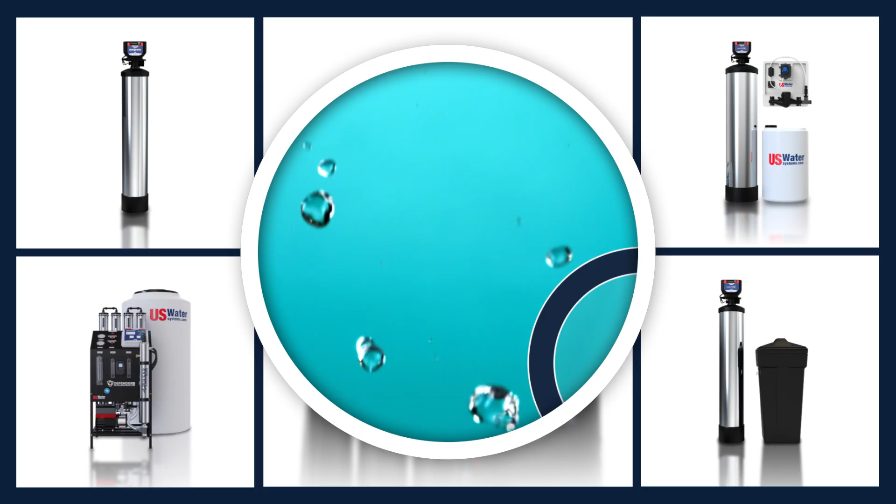In this US Water Systems review video, you'll see a lineup that covers all of those angles, and you'll get a clear feel for what daily life looks like with each setup, how it treats your water, how it fits into your home.

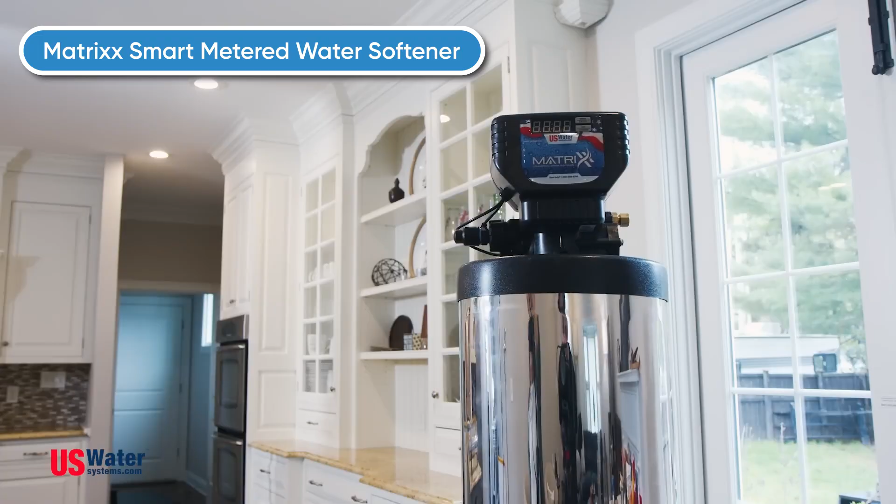Let's start with a smart, metered softener in these US Water Systems water softener reviews. Because if scale is your main headache, this is the kind of system that changes your day fast. You're swapping out the minerals that form hard crust in pipes and appliances, so your water heater, dishwasher, and washing machine don't spend their lives fighting buildup. In normal use, that shows up as fewer spots on fixtures and less of that chalky film you scrub off the shower. The upshot is you spend way less time cleaning, and your appliances get an easier job.

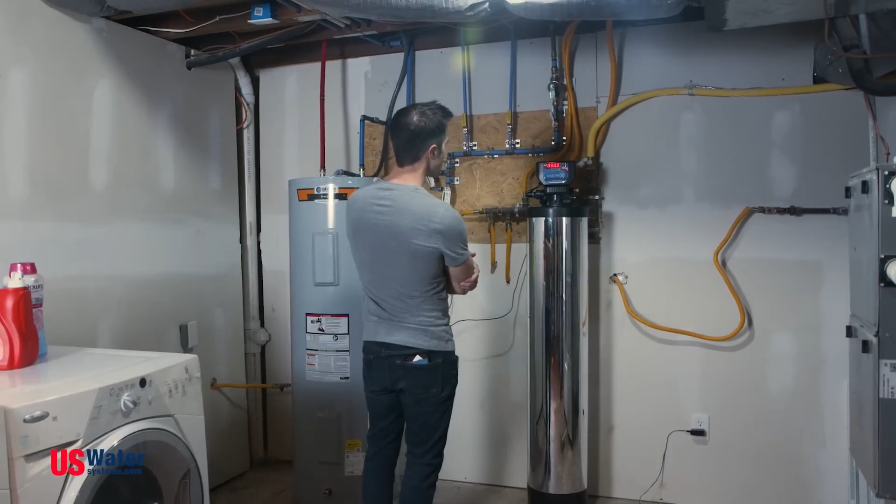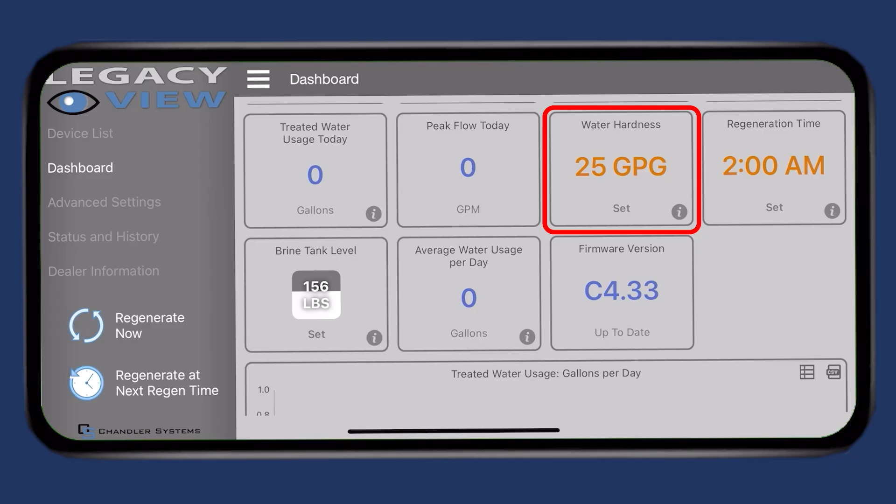What really shapes the experience here is the control valve and how you interact with it. This one uses a WQA Gold Seal certified smart control valve that connects to your phone over Bluetooth 5, so you can open the Legacy View app and see water use, regeneration cycles, and even salt levels without walking over to the tanks. You can adjust your hardness setting right from that same dashboard, so you're not guessing when you want the water to feel a certain way at the sink or in the shower.

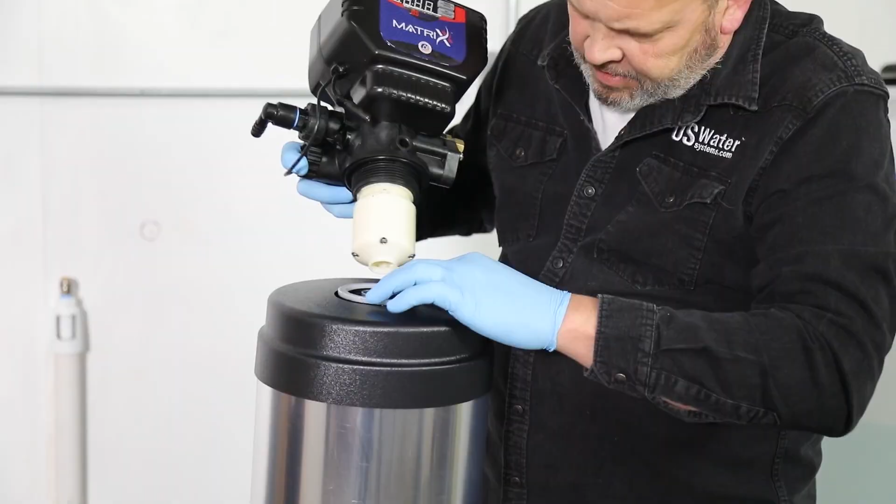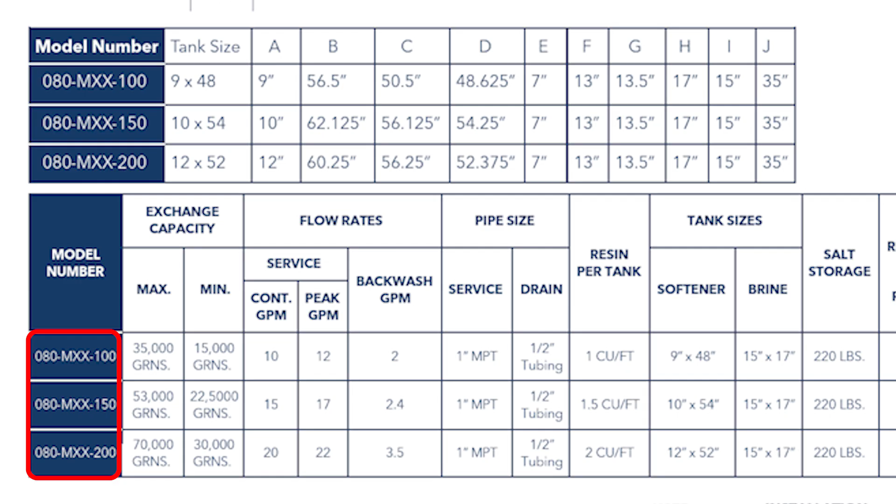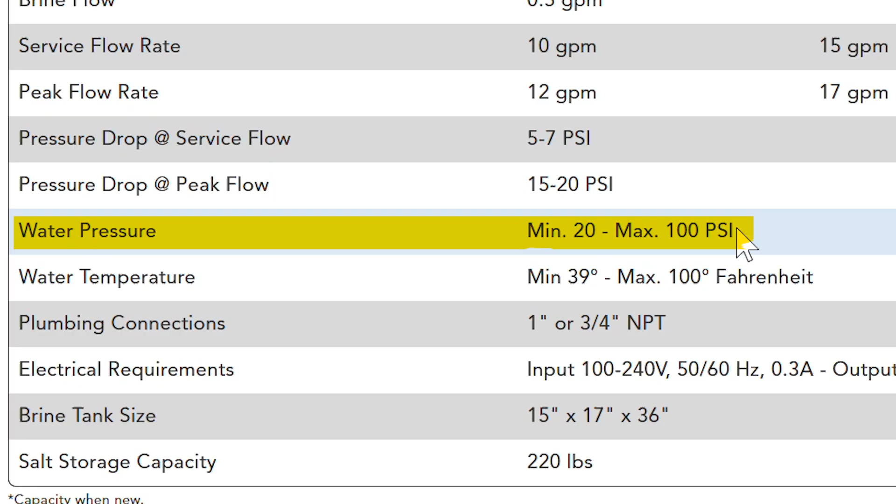Because it's built around a simple, single internal moving part, you get that set it and forget it vibe without losing the modern monitoring. Sizing and flow are where this system starts to feel like it belongs in a real household instead of a spec sheet. You can choose a 10, 15, or 20 GPM service flow configuration, so a bigger household doesn't have to tiptoe around showers and laundry. Depending on the model, maximum softening capacity ranges from 35,000 to 70,000 grains, so you can match it to how hard your water is and how much you use. And with a listed working water pressure range of 20 to 100 psi and water temperature range of 39 degrees to 100 degrees Fahrenheit, it's built to sit in the background and just keep up.

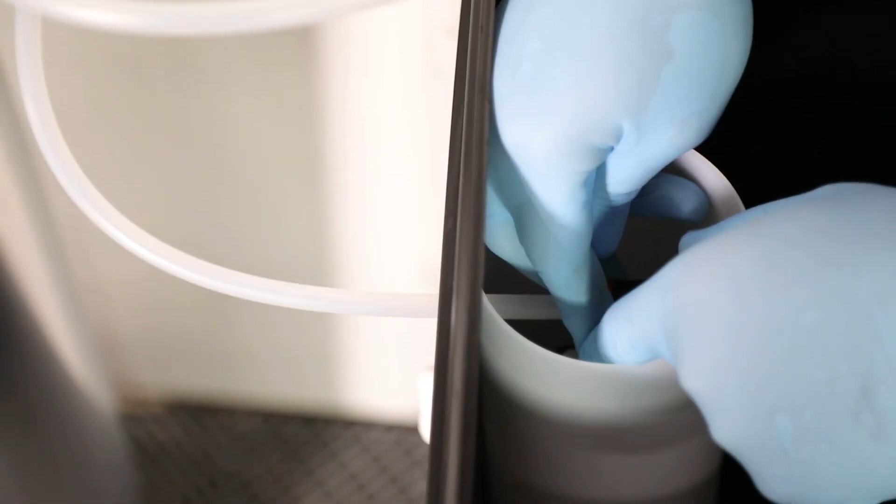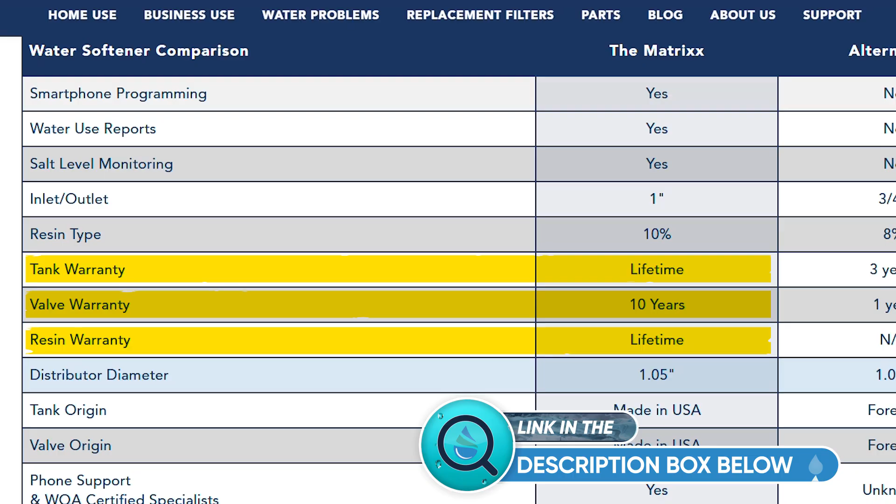Day to day, the routine is mostly about salt and peace of mind. The brine tank holds up to 220 pounds of salt and includes an internal float and safety overflow, so you're not topping it off constantly and you've got built-in safeguards around the refill cycle. It runs on low voltage and includes battery backup, so the system keeps its protection mindset even when your power blips. And with a lifetime warranty on the tank and resin, plus a 10-year warranty on the valve and electronics, this one makes the most sense when you want soft water that feels modern to own and easy to live with in this US Water Systems Reviews lineup.

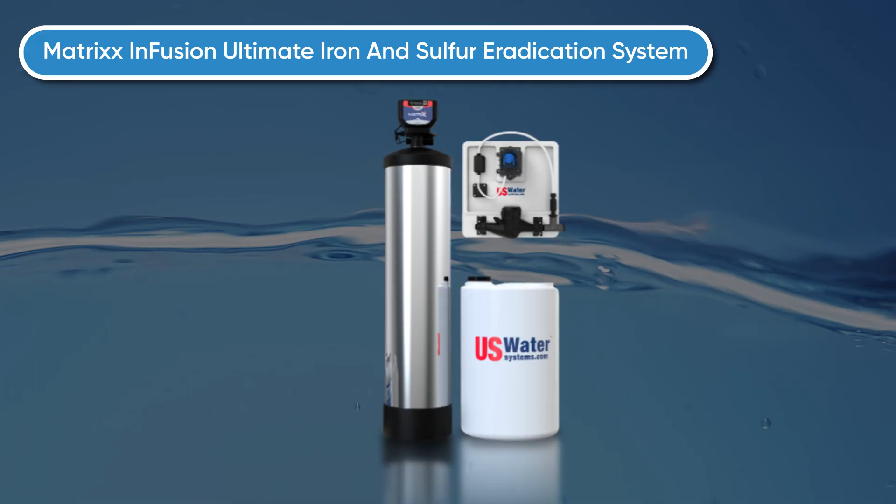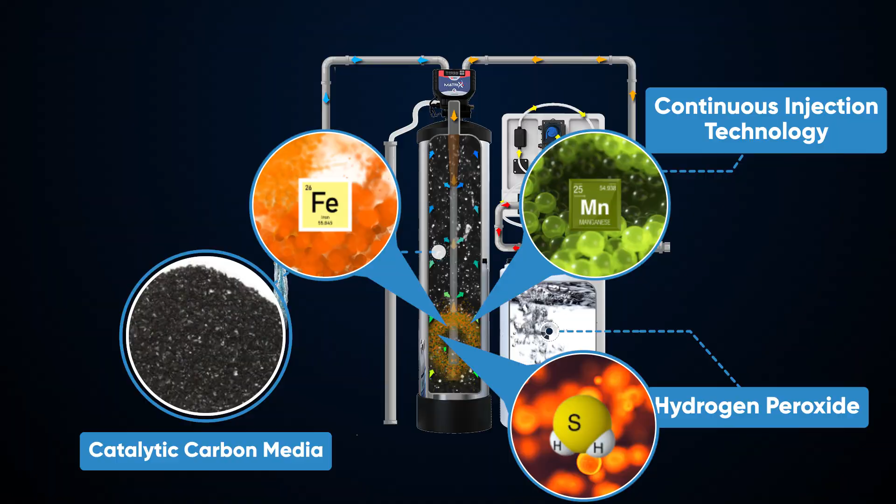This Matrixx InFusion Ultimate Iron and Sulfur Eradication System injects hydrogen peroxide using continuous injection technology, then pairs that with catalytic carbon media, so iron, manganese, and hydrogen sulfide get oxidized and handled in the filtration process. In practice, that's the difference between water you avoid and water you actually use, brushing your teeth without flinching, cooking without odor creeping into the steam, and rinsing sinks that don't instantly look stained again.

The reason that matters is simple: it treats the cause, not just the smell. The performance targets are clearly defined, which helps you match it to your situation. Typical contaminant removal is up to 20 parts per million iron, up to 30 parts per million hydrogen sulfide, and up to 1 part per million manganese. So you're not wondering whether it's meant for light nuisance issues or heavier well water challenges.

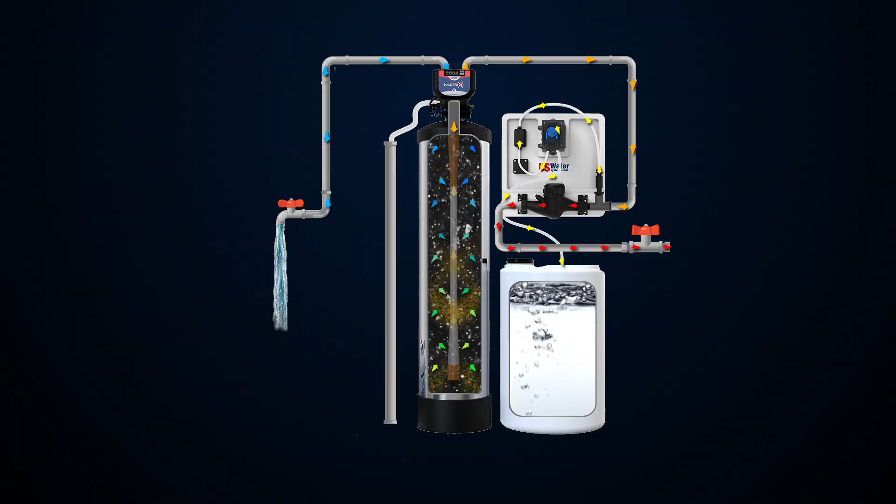It's built to work effectively in a pH range of 6 to 9. And it works with iron and sulfur-reducing bacteria too. So when your water problem feels layered, odor, staining, and biology all at once, you're working with a system specifically designed for that kind of messy reality.

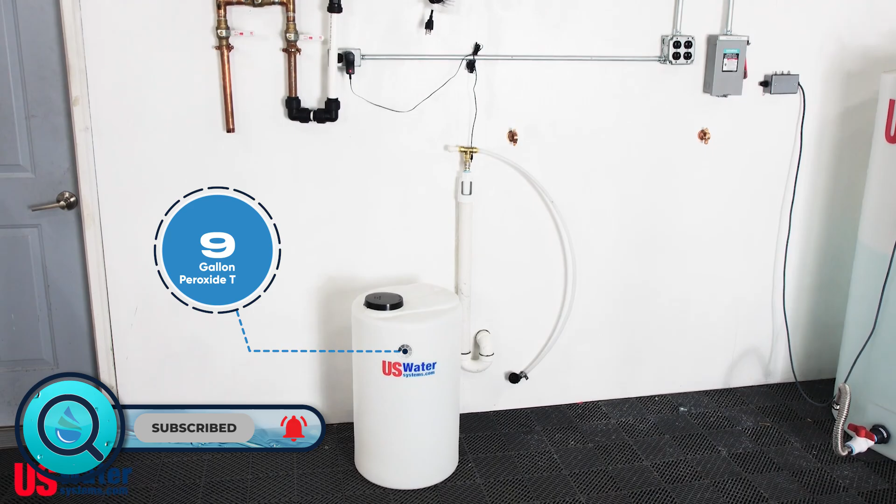Ownership on this one is all about controlled dosing and automatic cleaning. The setup includes a 9-gallon peroxide tank, a precision injection panel, the InFusion filter, and 10 gallons of H2O2. So you're starting with a complete treatment loop instead of piecing it together.

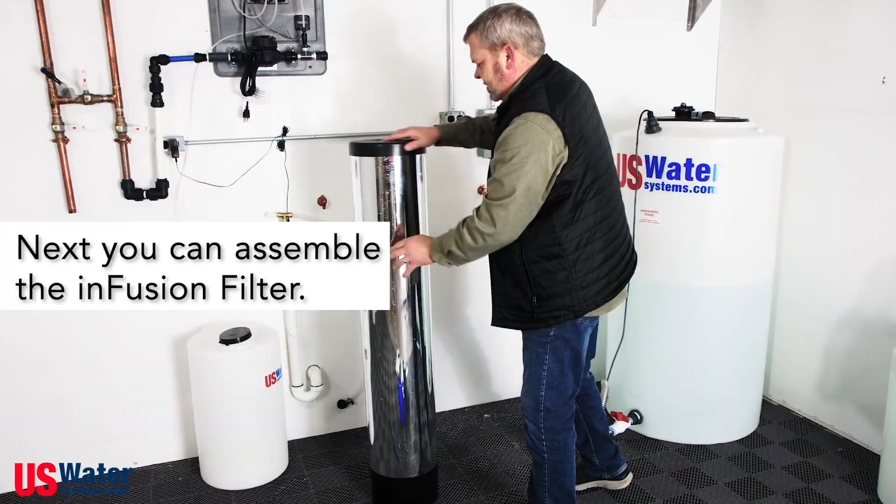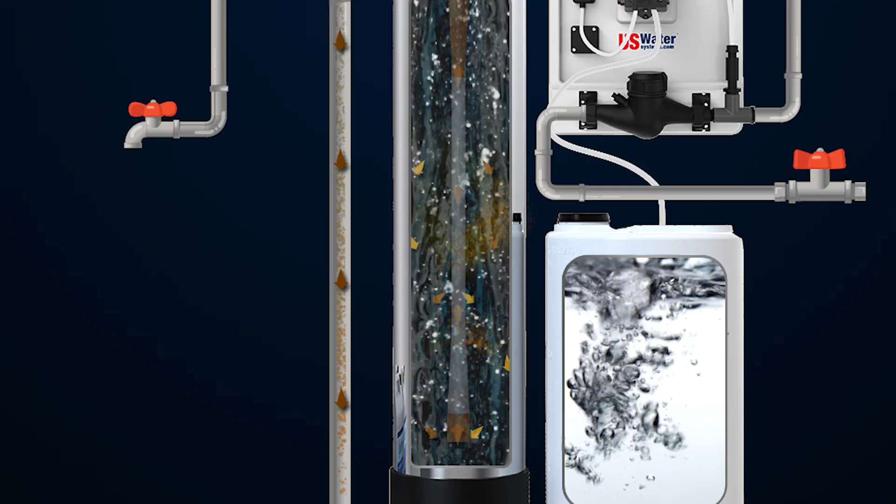An internal meter counts gallons used and monitors flow rates, and the system runs automated backwashing approximately every 2 days to clean the catalytic carbon bed. Daily backwashing is recommended for the most extreme cases. That translates to a system that keeps its media working without you manually resetting it.

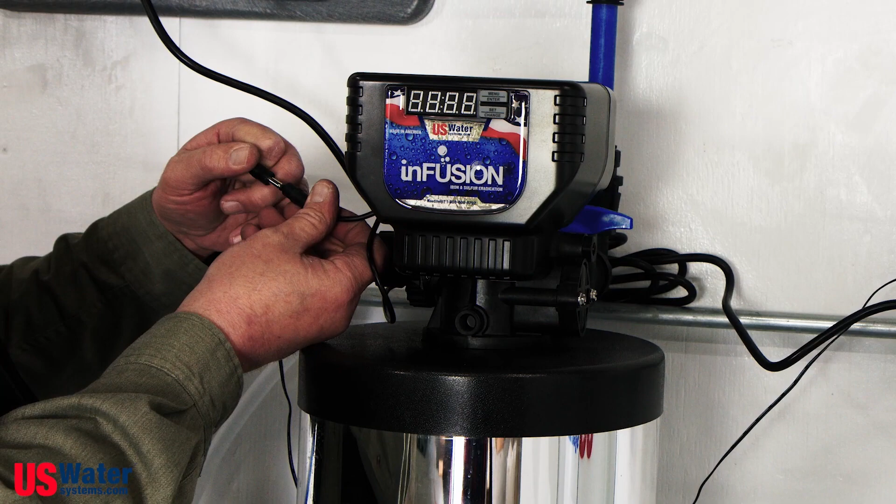Even the power and controls lean into low-hassle living. It runs on 12-volt operation, so you're dealing with low-voltage ownership, and it uses less than $2 of electricity per year, which keeps the ongoing overhead minimal.

Battery backup keeps the memory during a power outage, so you don't lose your settings when the lights flicker. And with the smart valve setup tying into your phone over Bluetooth, you can set timing and cycle behavior in a way that fits your household rhythm. Then you go back to using your water without thinking about it.

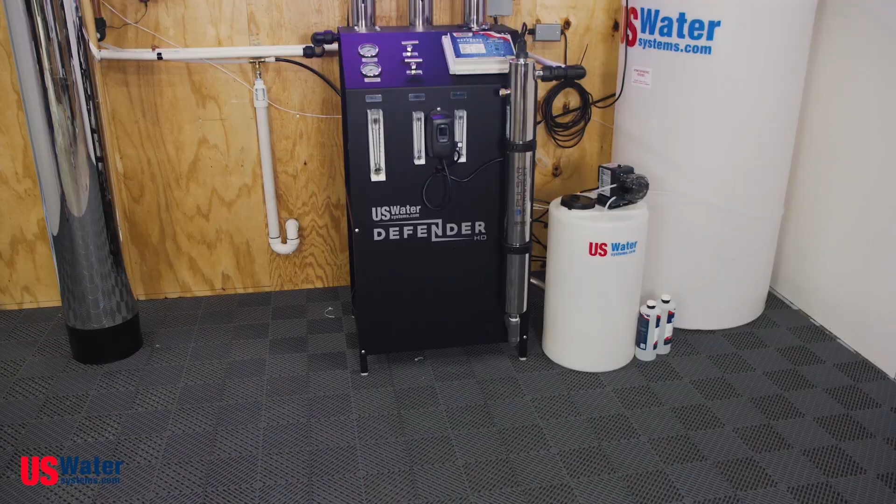All right, now we're stepping into whole home reverse osmosis territory, one of the bigger systems in this US water systems comparison, the kind of setup you choose when you want RO-treated water across the house, not just at one little faucet.

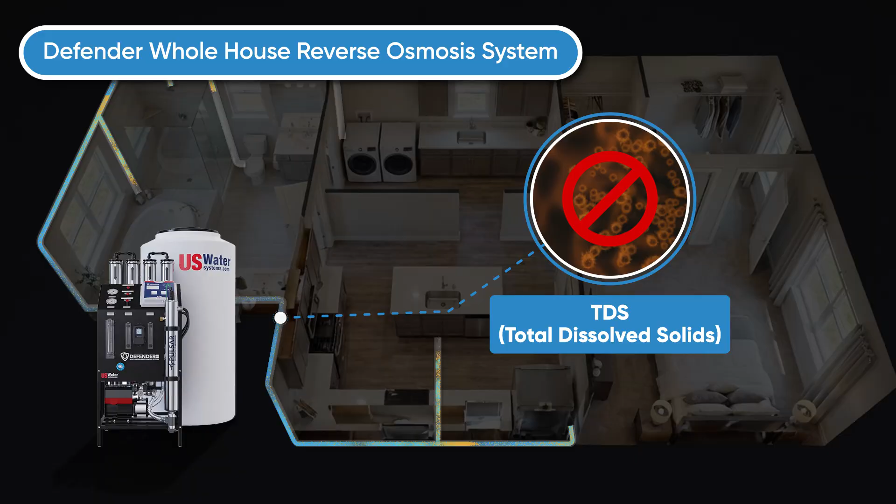The highly rated Defender Whole House Reverse Osmosis system is built to reduce TDS and all the nasty contaminants throughout your entire home, so the water feeding your kitchen, bathrooms, and appliances goes through the same core purification approach. It's also built with recycle and blending functionality, which, in addition to reducing wastewater, helps shape the final water you're using day to day. The result is a whole house feels different change, not just, my drinking glass tastes better.

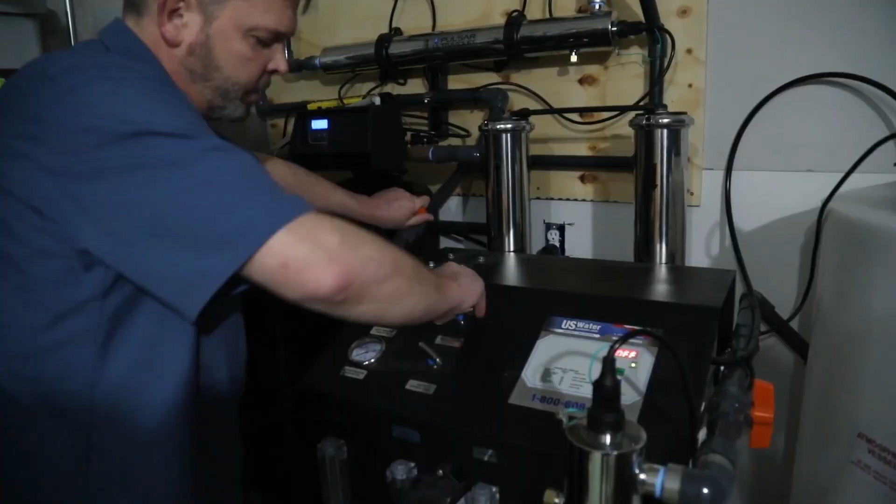The big decision point here is output and storage, because that's what determines how the system feels during busy household moments. You can choose production rates of 4,000, 6,000, or 8,000 gallons per day, so you're scaling for your home's demand instead of hoping a small system keeps up.

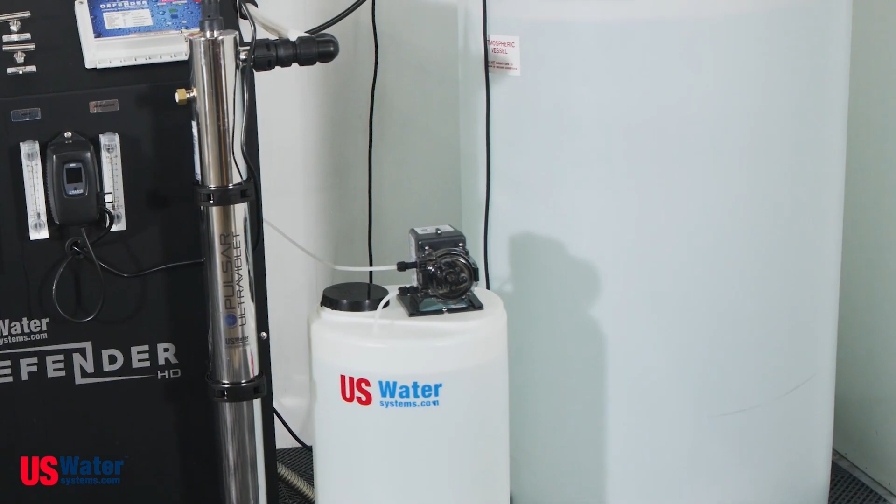On the storage side, you can pair it with a 140-gallon atmospheric holding tank, a 250-gallon tank, or even two 250-gallon tanks, so you've got a real buffer when the house is active. A float switch turns the system on and off based on that tank level, which means your RO production runs like a steady background process instead of something you babysit.

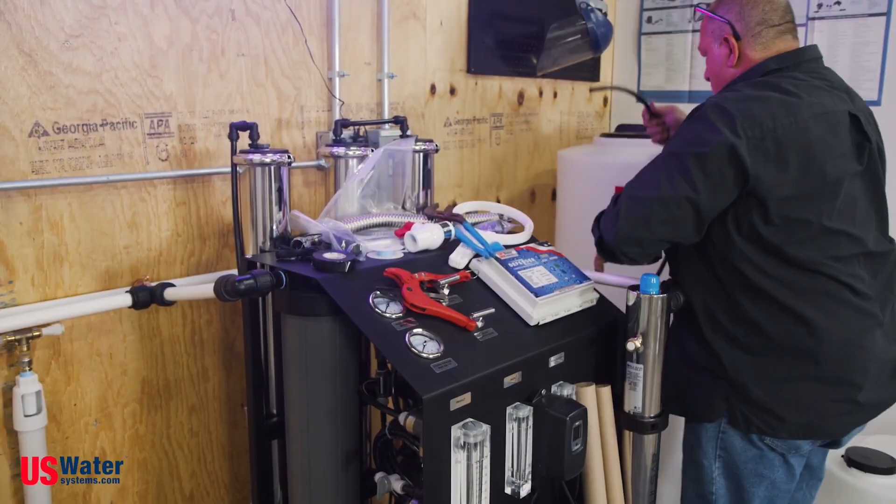Up front, it uses a 5-micron sediment pre-filter, and that matters more than most people realize in a US water systems review like this. That filter traps dust, dirt, sediment, and large particles, so the RO system isn't doing the dirty work with its most sensitive components.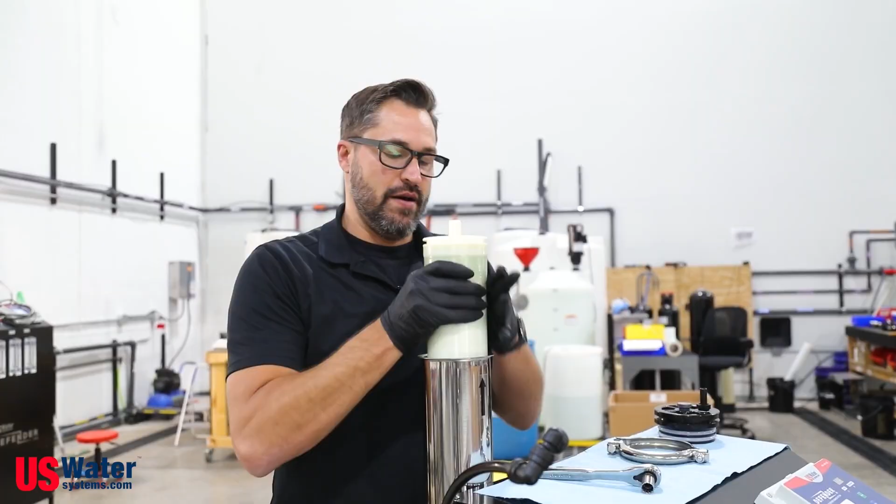The housing uses a double O-ring seal to prevent bypass, and it uses stainless reinforced connections, so your pre-filtration stage stays tight and consistent. In everyday terms, you get smoother operation and less wear and tear stress over time.

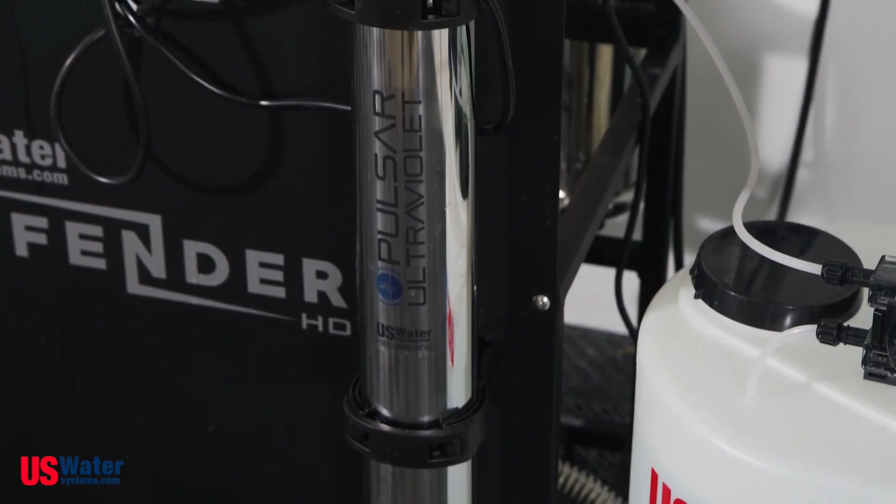On the finishing side, there's a pulsar ultraviolet disinfection for the final step, so you get an extra microbial safety net after the RO process. The UV unit includes an LCD display with bulb status and a bulb change indicator, so you don't have to guess when maintenance is due, and it has a lifetime warranty on the stainless chamber.

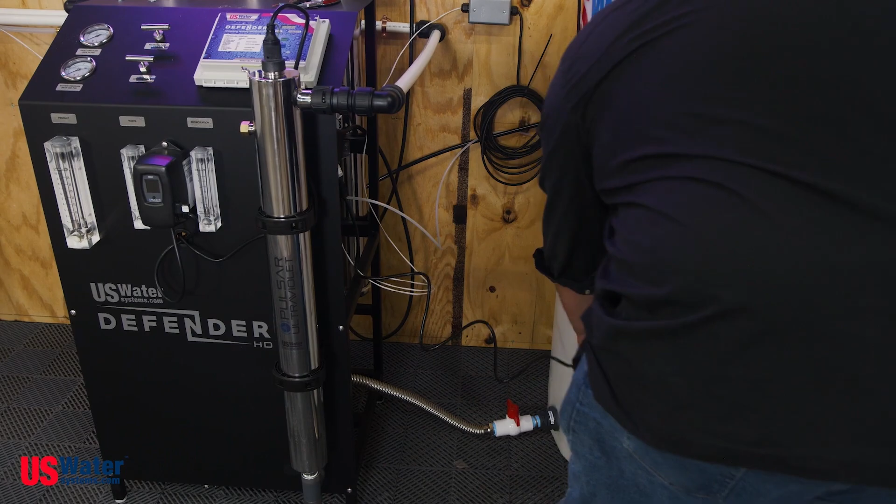You can also add an anti-scalant injection system that runs automatically with a food-grade concentrate designed to prevent limescale buildup and extend system life. And there's a pH boost option using a neutralizing solution designed to protect copper, brass, and other soft metals.

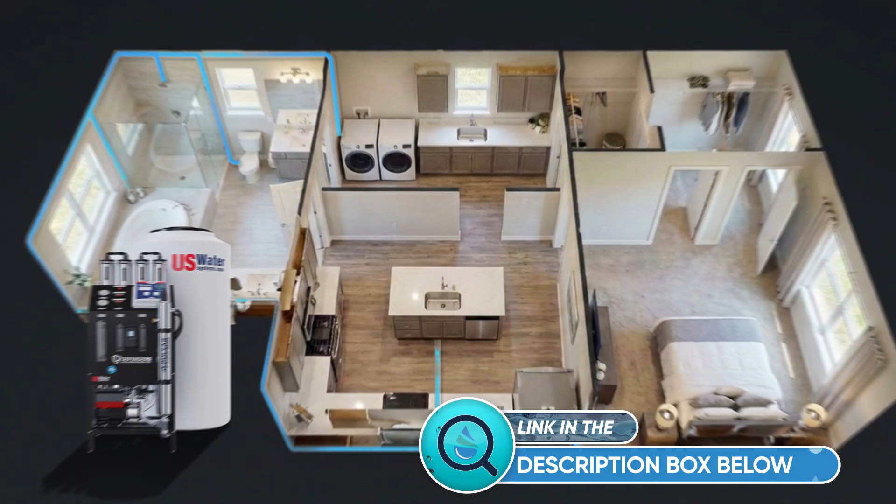Overall, the Defender is a high-output, whole-home RO setup that feels extremely well-engineered. Storage, protection, and finishing steps all working together in one American-made water purification system.

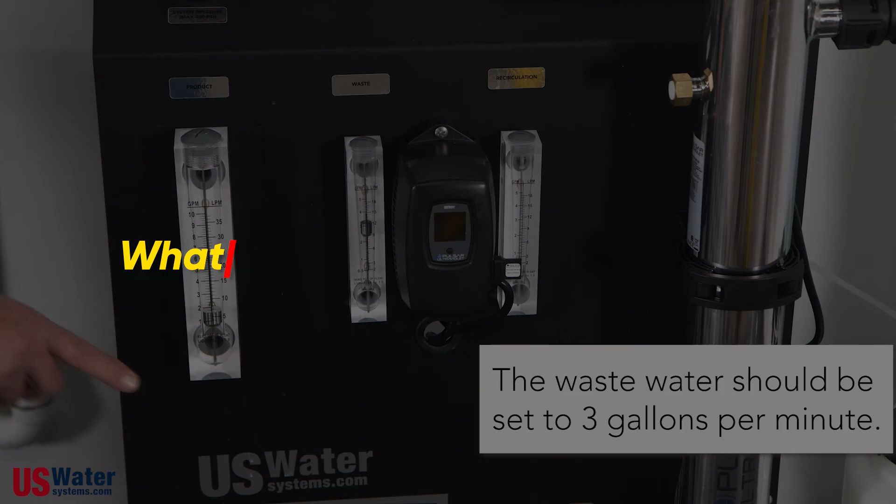Next up is a whole house filter, one of the best US water systems filter contenders aimed at chemical reduction across every tap, so your water experience changes everywhere at once. This one leans on carbon filtration to target chemicals like chlorine and chloramine, and also covers common problem compounds like MTBE, THMs, and PFAS, including PFOA.

In day-to-day use, you notice it when you make coffee, brew tea, cook pasta, or even just fill a glass without that sharp chemical bite. And because it's filtering the water feeding your shower, it's built to reduce chlorine vapors that can come off hot steam, so the bathroom air feels much easier to breathe.

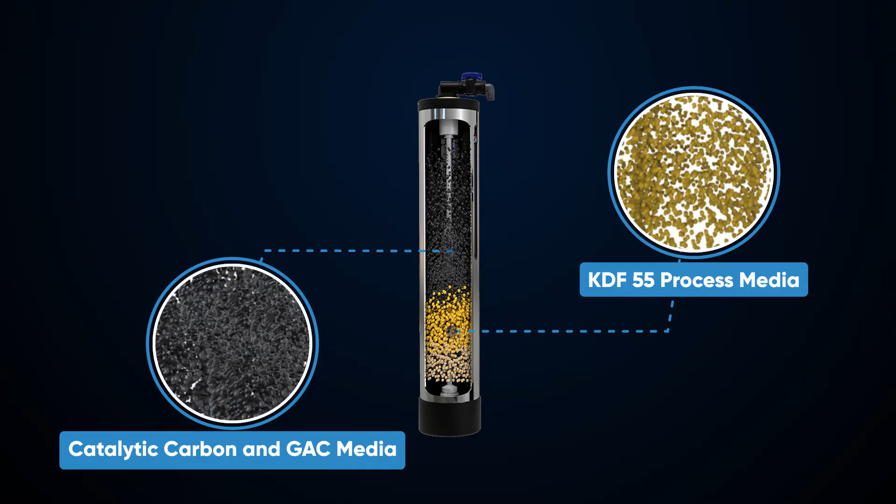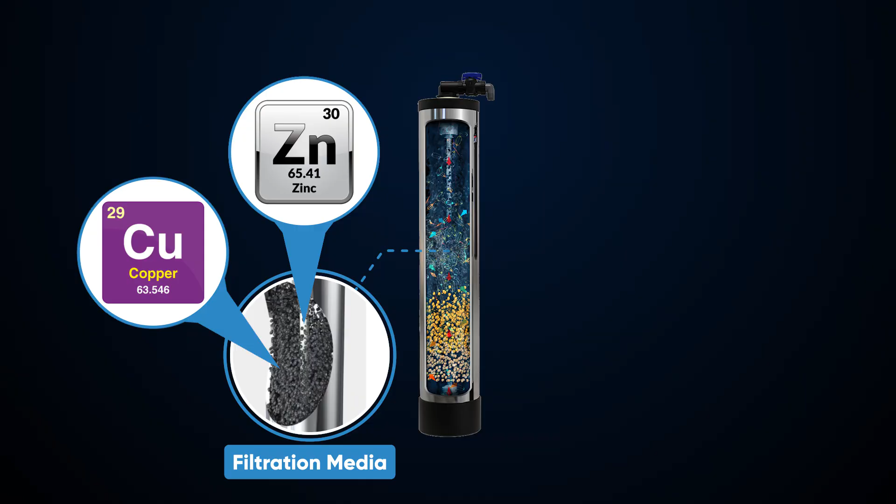The filtration media blend is a big part of why this system feels like more than just a carbon tank. It uses KDF55 process media alongside catalytic carbon and GAC media derived from coconut shells, so you've got a mix designed to tackle chemical reduction in a more layered way. It also includes filtration media infused with copper and zinc to prevent microbial growth, which helps keep the media bed in a healthier state over time.

The practical payoff is steadier performance and a system that's built to stay clean inside while it does its job. Flow and whole-house comfort matter here, because nobody wants a filter that turns showers into a trickle.

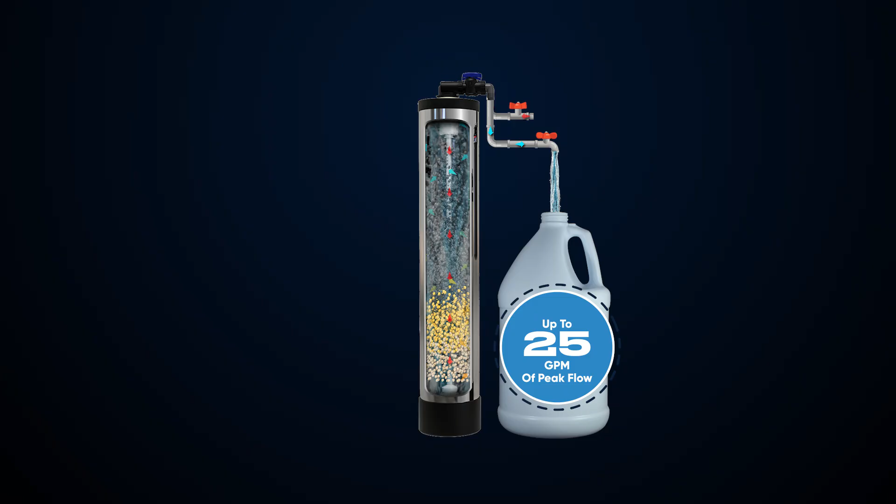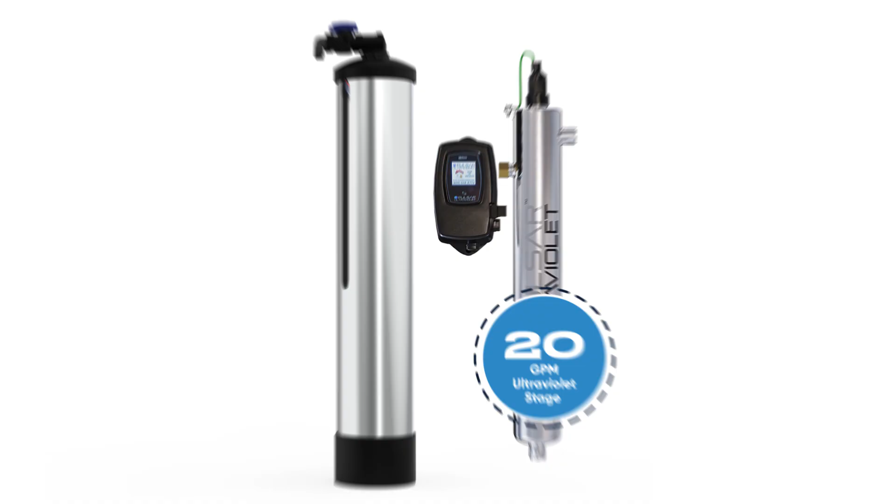The system uses full 1-inch inlet and outlet ports and is rated for up to 25 gallons per minute of peak flow, so it's built to support normal household demand without a pressure penalty feeling. There's also an optional 20 gallons per minute ultraviolet stage available, which lets you add a disinfection layer if that matches your water situation. So when you're running dishes while someone showers, the system is designed to keep your water feeling like water, just way cleaner.

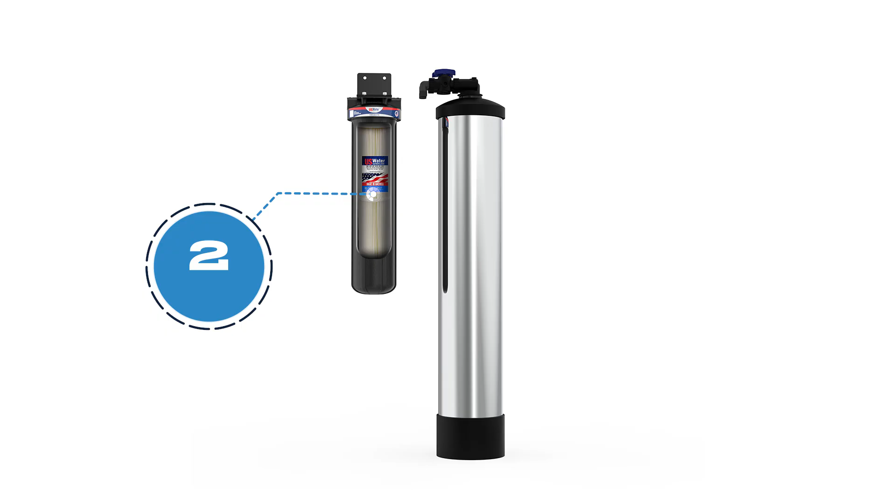Maintenance is refreshingly straightforward, and it's easy to picture what you're actually doing as an owner. There's one 5-micron sediment pre-filter that you change every 6 to 12 months in normal use, so you've got a simple, predictable cartridge routine. The carbon in the tank is meant to be rebedded every 5 to 7 years for continued chemical removal, which makes the big maintenance moment a long interval event instead of a constant chore.

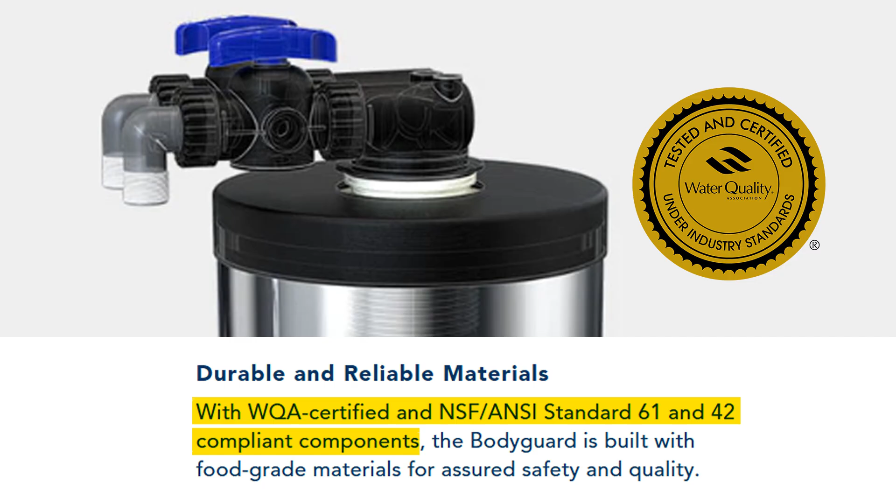With WQA-certified components that are listed as NSF and ANSI Standard 61 and 42 compliant, plus a 1-year satisfaction guarantee, this system is best when you want cleaner tasting, more comfortable whole-house water without turning maintenance into a hobby.

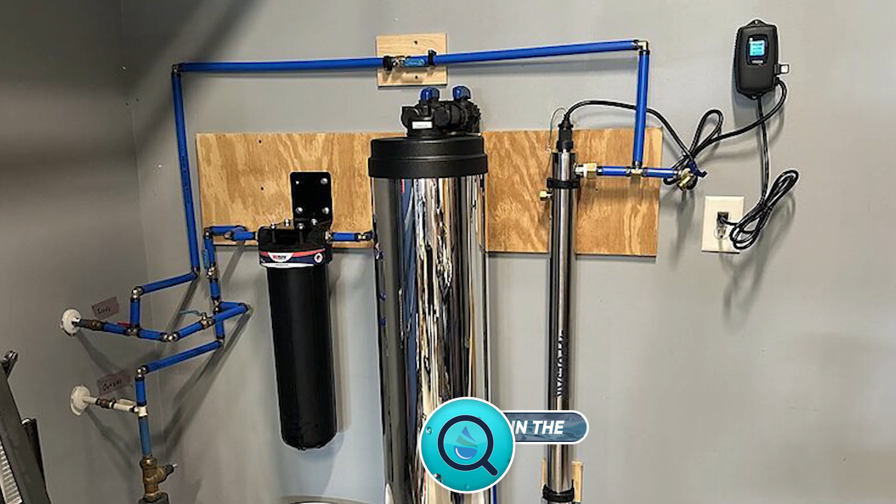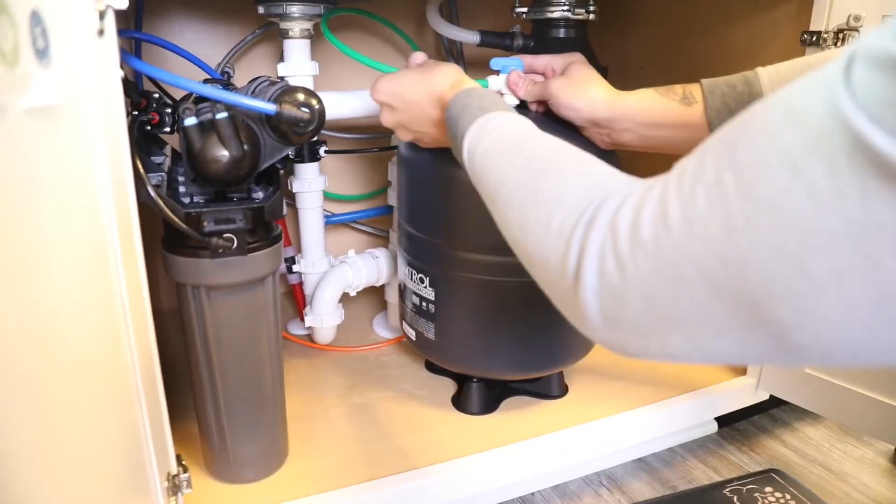Finally, if you're narrowing down the best U.S. water systems water filter shortlist, let's bring it down to the undersink level, because sometimes what you really want is one dedicated faucet that gives you the best water in the house on demand.

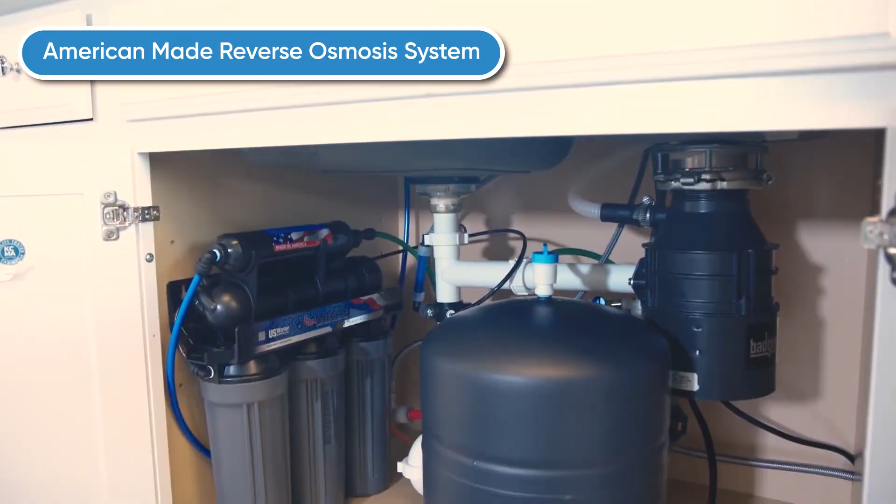This American-made reverse osmosis system lives under your sink and feeds a separate drinking faucet. So you pour a glass, fill a kettle, or top off a bottle without thinking twice. The system includes a double O-ring seal design for guaranteed 100% filtration.

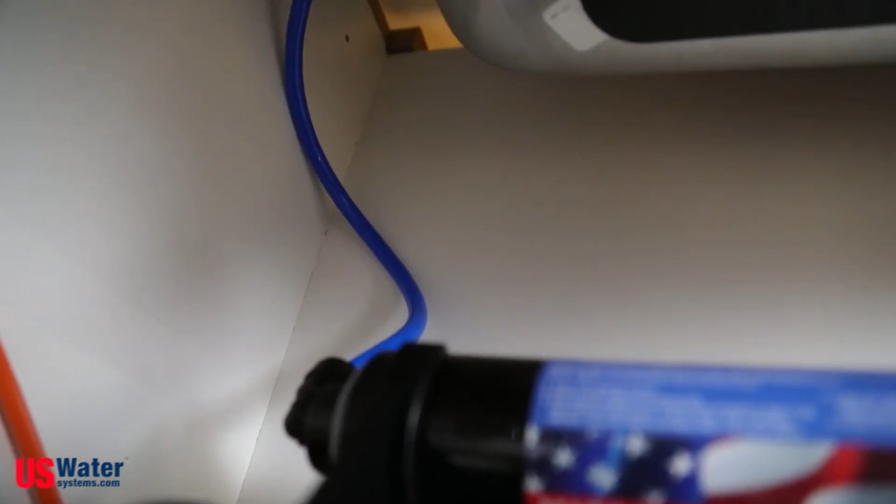Unlike with cheaper RO systems, the water actually stays routed through the filtration path instead of sneaking around it. That means the water you pull from that faucet matches the whole point of owning an RO system: consistent, intentional filtration. The filtration train is built in stages, and each step has a clear job you'll feel in real life.

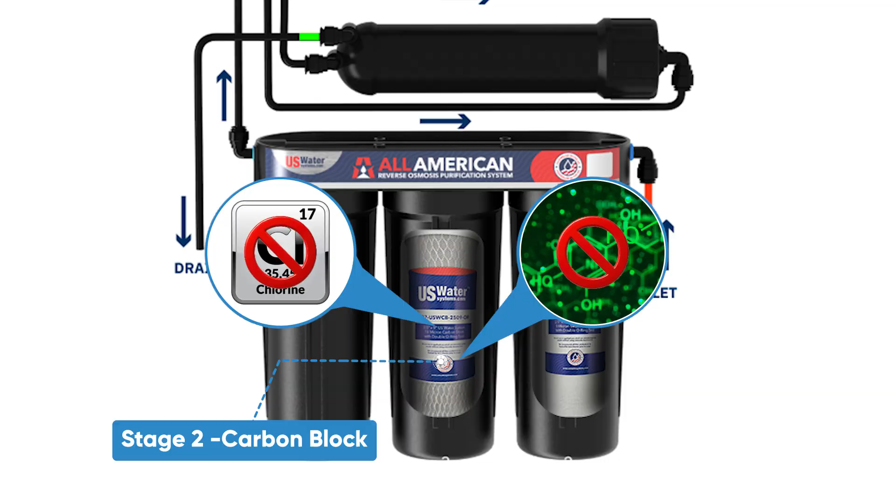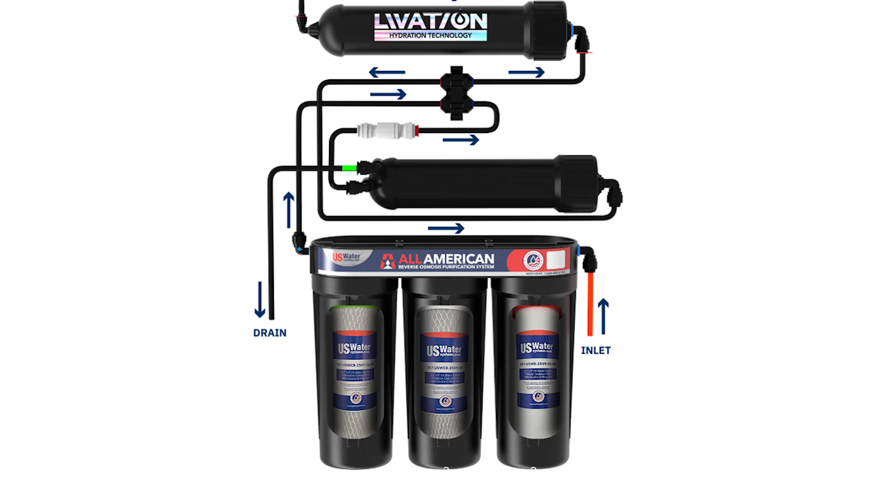Stage 1 is a sediment filter that captures dirt and rust, so the rest of the system doesn't clog up doing heavy lifting. Stage 2 uses a carbon block to reduce chlorine and other chemicals, so your water loses that treated taste that ruins coffee and tea. Then Stage 3 uses a sub-micron carbon block to reduce chloramine and PFAS and keep the RO membrane working at its best, so you get a cleaner baseline before the deep purification step.

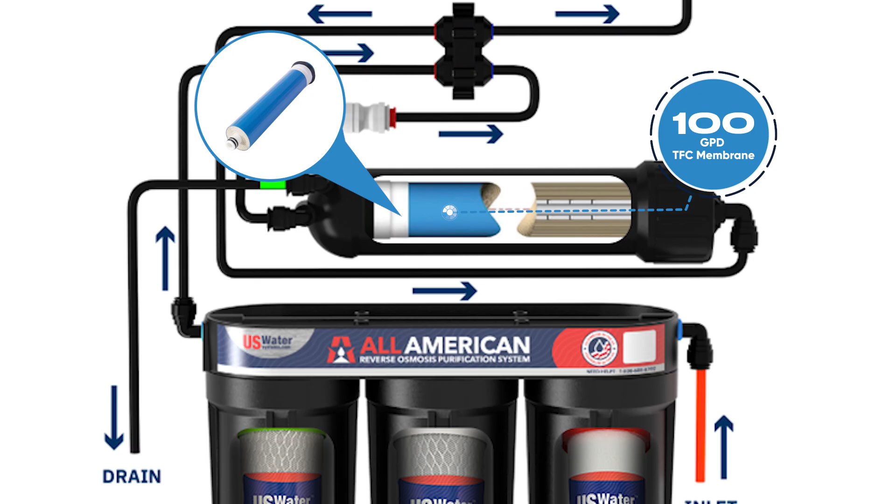The RO membrane is where the true separation happens, and this one includes a 100 GPD TFC membrane, so you're working with a system designed for steady daily drinking water production. That membrane reduces heavy metals, fluoride, and other dissolved solids, so the water you drink feels crisp and stripped of the stuff you didn't want in the first place.

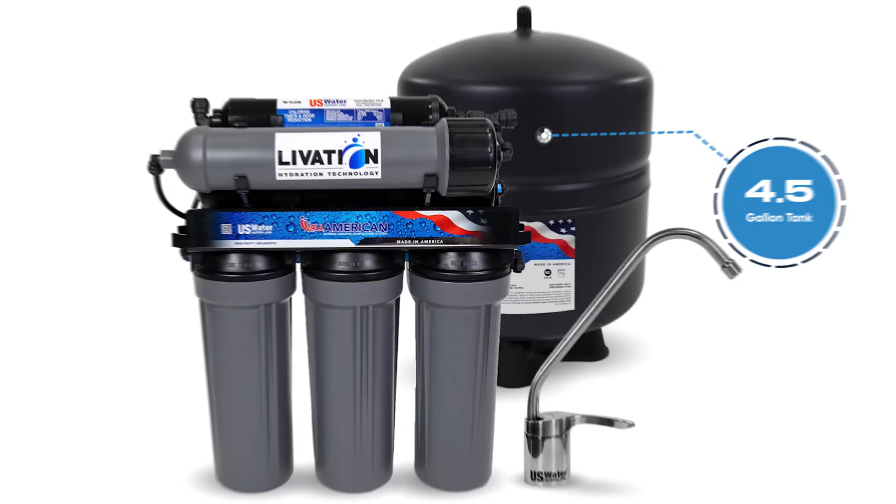On the storage side, you get a 4.5-gallon tank, so you can fill a few bottles back-to-back or knock out cooking water without waiting on the membrane to catch up. There's even a tank base that lets the tank sit upright or lay on its side, which makes undersink placement feel far more doable.

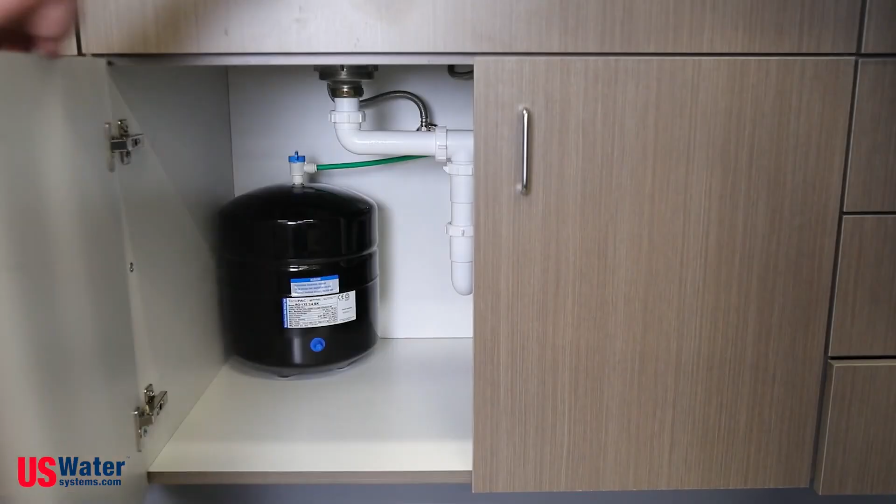Installation and ownership details are built to feel approachable, even if you're not a plumbing person, which is a big deal in these US Water Systems reviews. You get color-coded tubing with 4 connections, plus a tube cutter, so the routing is clear when you're working under the cabinet.

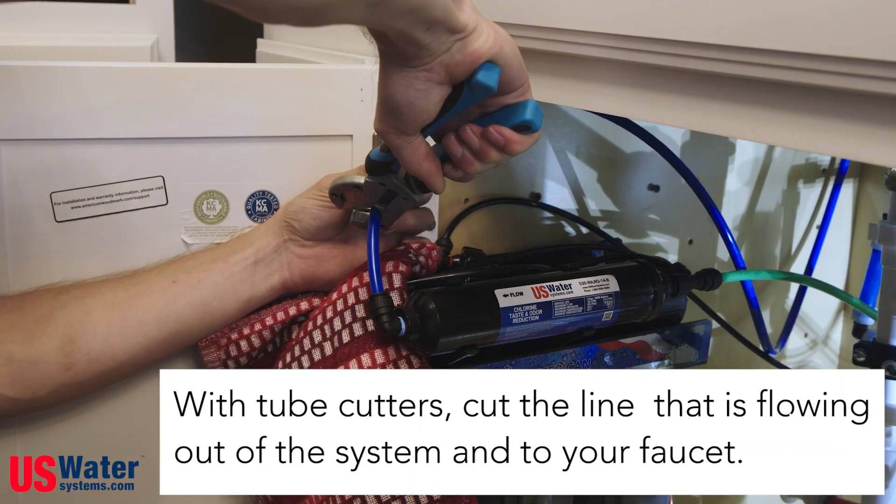The package includes a lead-free ceramic disc faucet, a quick connect drain saddle, and a TDS meter, so you can check your water quality in a simple, concrete way whenever you feel like verifying performance.

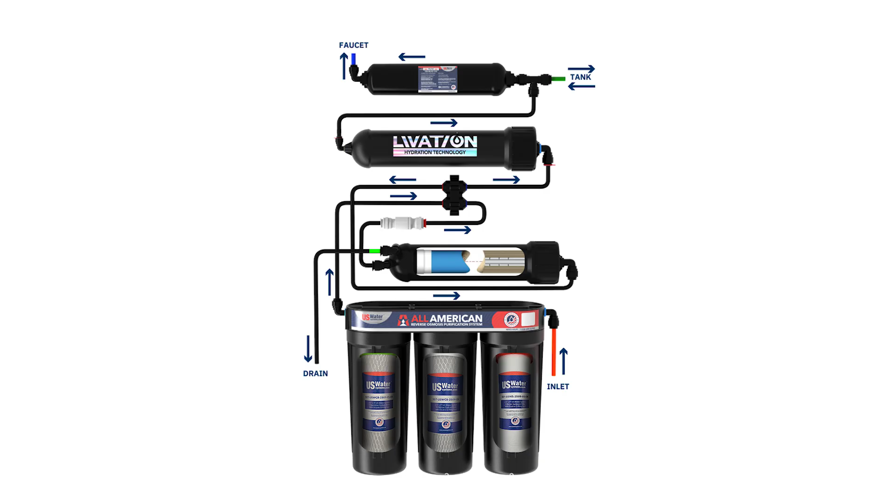And if you want your RO water to taste more like mineral water, there's an optional Stage 6 alkaline remineralization filter that adds minerals like calcium, potassium, and magnesium, and targets a pH of 8.5 to 10.0, so your water feels less flat and more naturally rounded.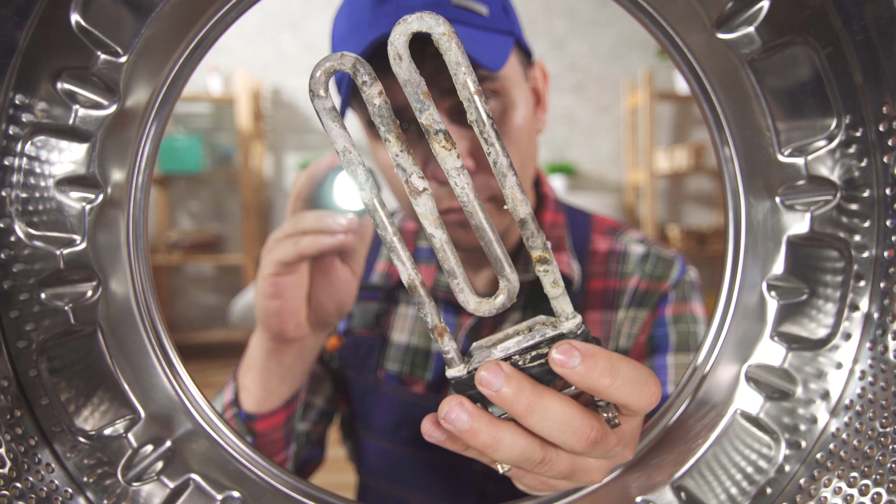So here's the simple way to choose in this U.S. water systems comparison. If scale and appliance protection are your main goal, the smart metered softener is the one that reshapes daily life with less buildup and smoother water feel. If your well water brings iron stains or that rotten egg odor, the peroxide injection and catalytic carbon approach is built for that specific fight.

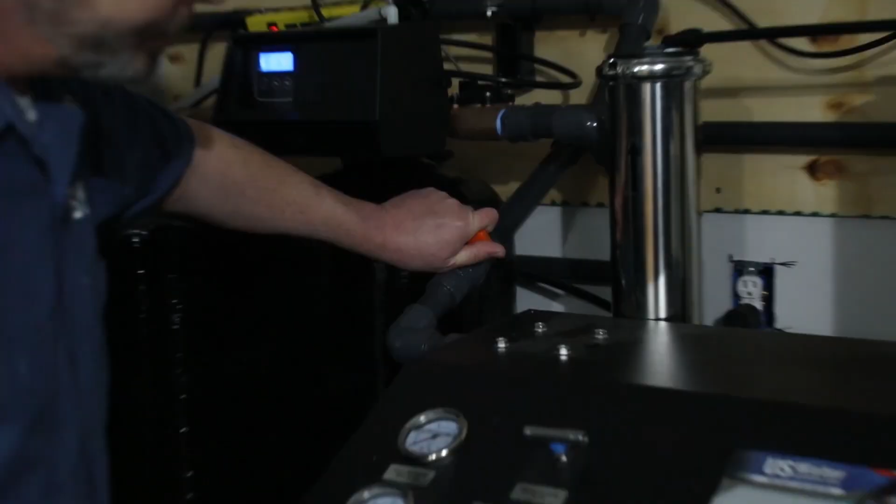If you want RO-treated water across the entire home, the whole house RO setup is the big system answer. And if you mainly want great-tasting drinking water without touching the whole house, the undersink RO keeps it focused and practical.